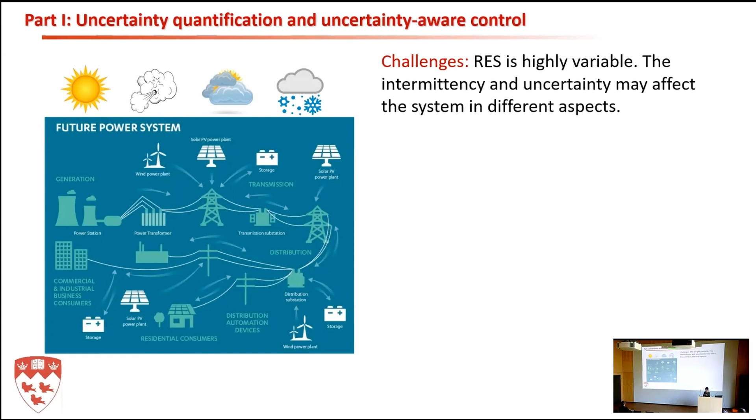Okay, so the first one, uncertainty quantification and uncertainty-aware control. The motivation of the work is the continuous integration of renewable energy sources. We all know that this trend is going to continue in the near future because we want to develop net zero power grids to mitigate climate change, to develop sustainable communities and so forth. The challenges of integrating renewables are obvious, right? They're subject to the weather conditions. The sun doesn't always shine and the wind doesn't always blow when we need the power. So they are highly variable, and the intermittency and uncertainty may affect the system in different aspects.

So here is just a figure to show the uncertainty we experience in the system. We not only have uncertainty on the load side, which is what we have originally, but we also have uncertainty on the generation side.

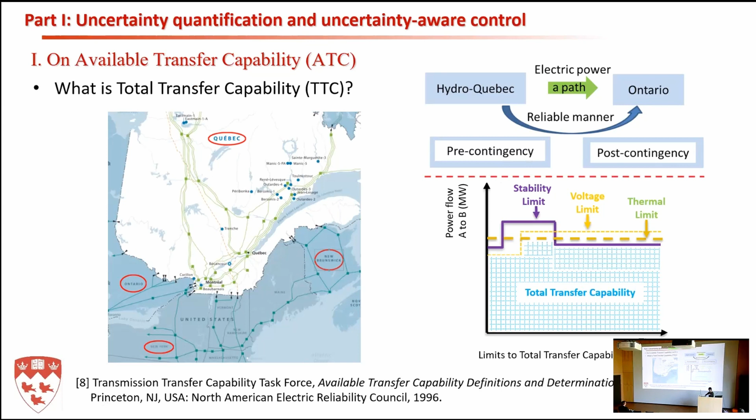So for example, if we want to transfer power from Quebec to Ontario, we want to make sure that the power transfer is carried out without violating the stability limit, the voltage limit, and the thermal limit. And as the power system is evolving and changing all the time, you can imagine that the total transfer capability needs to be assessed from time to time.

Okay, and then what is available transfer capability? Usually when we calculate it from the total transfer capability, we deduct three margins. One is the existing transmission commitments, which is the ETC, and the other one is the capacity benefit margin, CBM. These are determined by, for example, the utility market model or base power flow, which we just regard as deterministic values in this work.

But there's another margin which is very interesting. It's called TRM, the transmission reliability margin. It is reserved to account for the uncertainty of the system from different aspects like load or system topology change. All this uncertainty needs to be considered, so we typically reserve a margin just for that reason. Yeah, so this is how we calculate ATC conventionally. But in our opinion, when the renewables are coming to the system, it becomes highly volatile.

And rather than assess everything in a deterministic framework, we believe that we need to use a probabilistic framework to assess the TTC and ATC. So how does it work? So when we have the renewables and everything coming in, the TTC is no longer a deterministic value, and rather it's a random variable that may exhibit certain distributions.

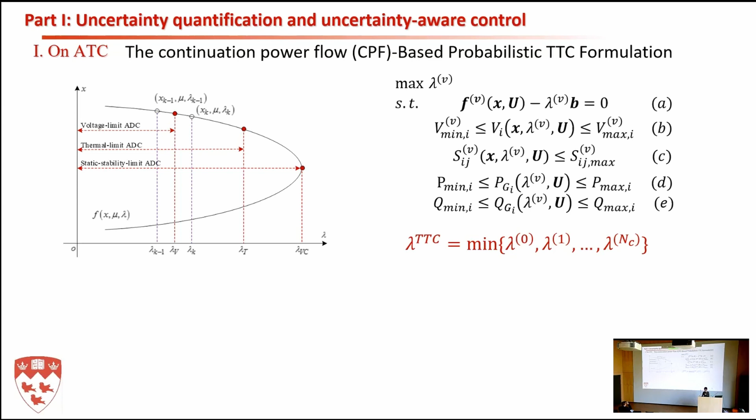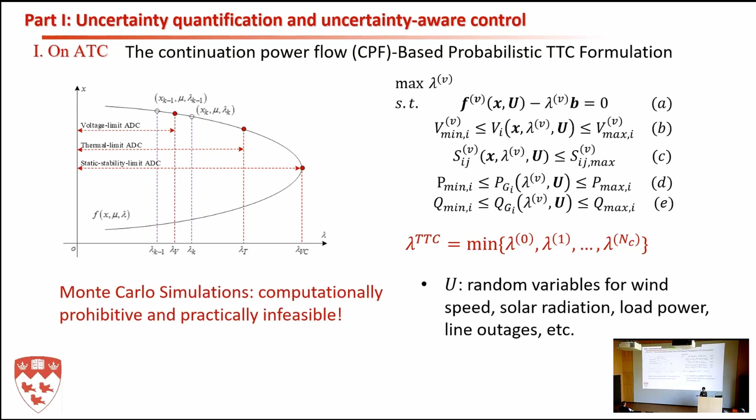And then when the renewables come in, it becomes more complicated because we are going to have random variables coming from wind speed, solar radiation, load power, line outages. So you can imagine if I want to get an estimate of the probability distribution of lambda, which is the TTC, the most straightforward way is to do Monte Carlo simulation, but it's going to take a long time, prohibitive computational effort, which is not practical in the real world. So what we propose in our work is to use the polynomial chaos expansion.

I know some of you may be familiar with this method because you're also working in this area. So we use the polynomial chaos expansion to effectively and accurately estimate the PTTC. Originally with Monte Carlo simulation, we generate a large number of random inputs, scenarios, and we feed them into the physical continuation power flow model, like what I showed here, and it gives you the response. You can do a lot of simulations and plot the histogram.

Well, the PCE does it in a different way. It first generates a small sample and feeds it into the physical model to get the response. And from the small number of evaluations, we try to build a surrogate model, which can describe the relation between the random inputs and the output by expansion of the polynomial series. So this is how it works.

And once we get this model, assessing the model response takes negligible time. We just generate the samples and substitute them into this model to get the model response Y. So this is why it saves time, because this model is just an algebraic model. Once you get this model, evaluating it takes no time. We only need a very small number of sample evaluations at the initial stage. So this is how it works.

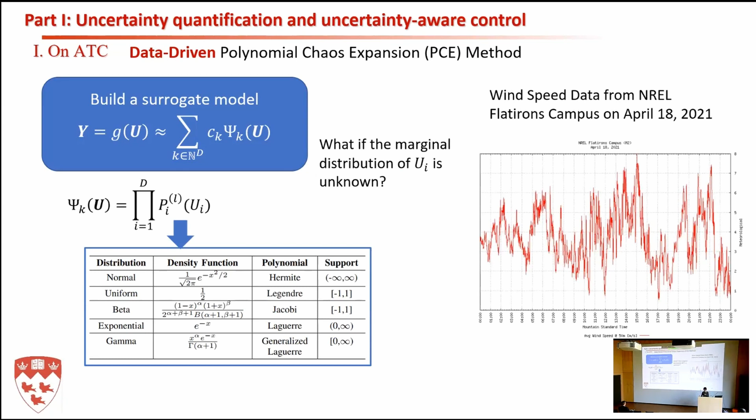And indeed, this is what I got from the website, that accessing raw data nowadays is not hard. Thanks to many initiatives, we have open data. All right, so in this work too, we use what is called the moment-based polynomials to build up the polynomial basis. So it turned out that we can simply use the raw data, and by using the condition that the polynomial bases are orthogonal to each other, we have shown that the coefficients for the polynomials and the raw moments of the data satisfy this condition.

Okay, and then it means that we can only calculate the raw moment of the data, and then we can calculate the coefficients. And with the coefficients, we can build up the univariate polynomial basis. And then using the tensor product, we can calculate the multivariate polynomial basis. And this is what we propose in our work too. This is a data-driven PCE method. And once we build up the polynomial basis, the remaining task is just to calculate the coefficients for the model, and there are different ways to do that. We adopt an advanced regression method called least angle regression to calculate the coefficients.

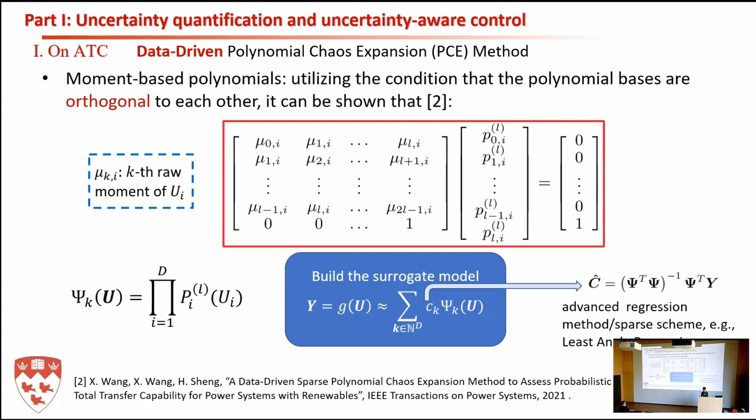All right, so this is how it works. Just to recap, we generate a small number of scenarios, we feed them into the model, get the response, and based on this, we try to build up the surrogate model. And then once we have the model, we can just generate a large number of random inputs to get the model response and plot the histogram.

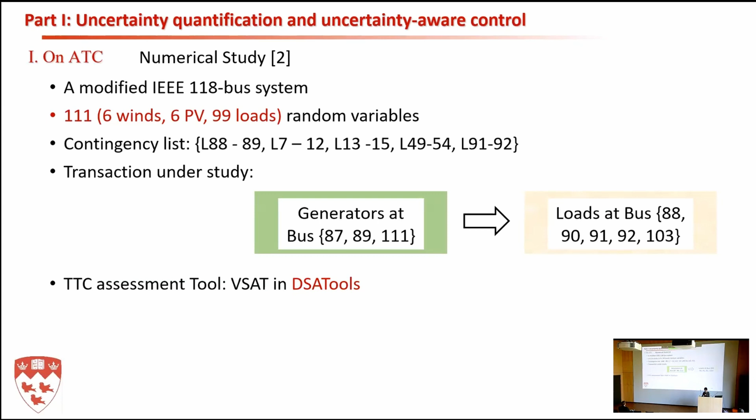Just to show some simulation results, this is what we do in a 118 bus system where we consider 111 random variables. 6 come from wind, 6 come from PV, and 99 loads. And for the transaction under study, we consider the power transfer from the generator at these buses to load at these buses. And the TTC assessment tool is VSAT in DSATools. DSATools is the commercial power system analysis software. I think it's what they use in both industry and academia.

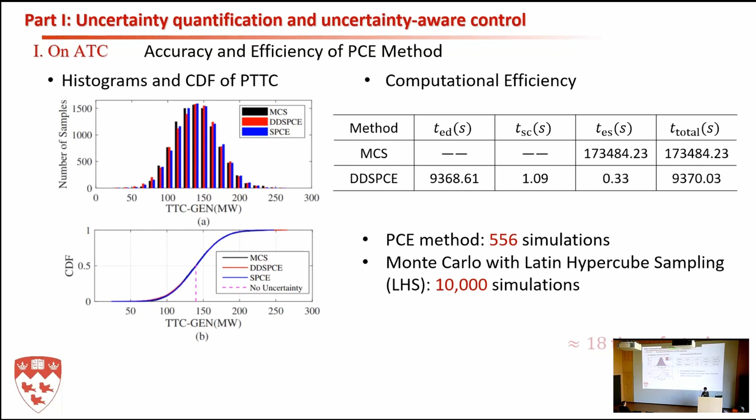And then we compare the computational efficiency. For the Monte Carlo simulations using the Latin hypercube sampling method, if we have to run 10,000 simulations, it's gonna take you 173,000 seconds, okay? But if we use the data-driven sparse PCE, most of the time is consumed by generating the small number of sample simulations and model responses. And once we generate that, building up the model and the sample evaluation takes very little time. So in total, it takes around 9,370 seconds. So it's around 18 times faster than the Monte Carlo simulations.

And another interesting thing we observe is that, for example, if we just adopt the deterministic framework to estimate ATC, we reserve 5% of the TTC to be the TRM, right? And then it will be around 6 megawatts, and the resulting ATC is 132 megawatts. However, if we use a probabilistic framework, if you still remember, we use the difference between the mean value and the 5th percentile of the TTC as the TRM, okay? And it's gonna be 49 megawatts, and the ATC will be 90 megawatts.

So it means that when we consider the uncertainty of the renewables and all the loads in the system, the ATC needs to be reduced by more than 30%, which is a very significant amount, okay? But what I'm saying is that it's not always a reduction, right? Sometimes it might even increase, but we just want to get a more accurate estimate of the ATC so that you can ensure the system security and in the meantime fully utilize your transmission assets, right? Because power transfer actually means money, okay?

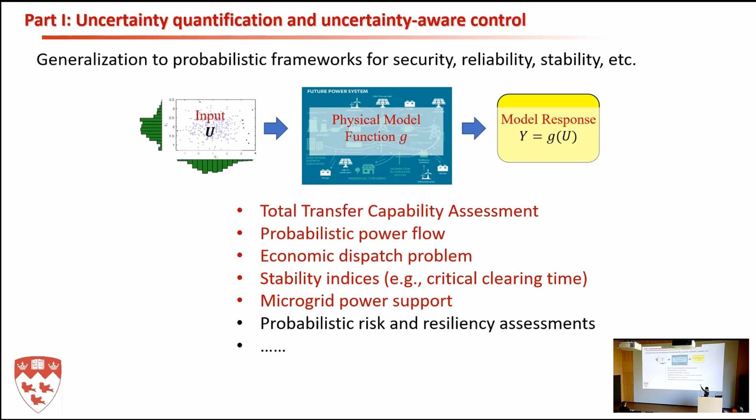applications. So here are just some examples of the applications we can consider. Those marked in red are something we have already studied in our group, and there are also some other things we're going to investigate. Like probabilistic power flow, for sure, economic dispatch problem, the stability index, the microgrid power support, okay? And for different applications, the only different thing is the physical model, right? And the methodology can be universal.

So, for example, we consider how the uncertainty is going to affect the economic dispatch cost. And in this problem, the model response will be the cost, the minimum cost of the economic dispatch. So we're trying to dispatch the power output of the conventional generation while considering the uncertainty from the renewables. So this is basically the model formulation.

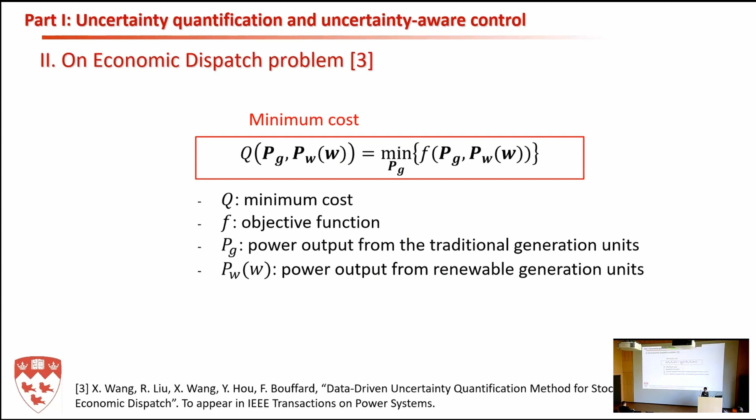And in this case, as I said, the model response rather than TTC will be the cost, minimum cost of the dispatch. And we consider an integrated energy system. We have a 118 bus system integrated with a 20 node gas system. And in this study, we consider 120 random variables, 5 coming from wind farms, over 24 hours. And total installed capacity is about 12.3% of the total capacity.

All right, so again, we first compare the estimation results for the CDF and PDF. Both data-driven sparse PCE and sparse PCE can give pretty accurate estimation. In this case, you might observe that the distribution of the cost is kind of irregular compared to the TTC. It's kind of multimodal, not clearly a Gaussian distribution. So at the beginning, we were concerned that the PCE may have some challenges, but it turned out that it can still give relatively good estimation results.

And also here, just to note that we use the real data from the website for the wind. In the last study, we used emulated data, but in this study, we try using the real wind data and see how it works.

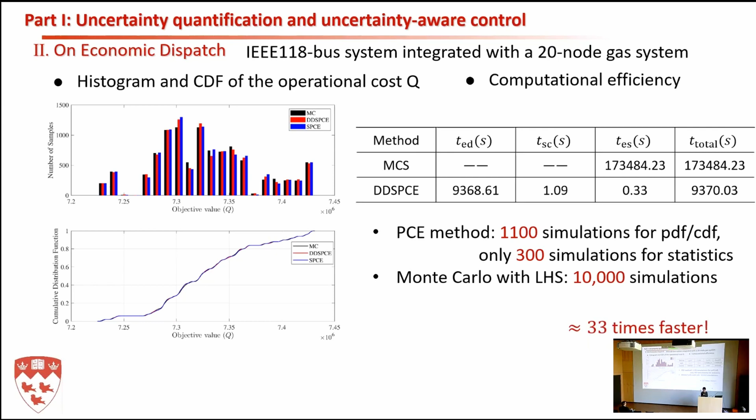And also we compare the computational efficiency. Again, if we only want good statistics like the mean or the variance, the PCE just requires 300 simulations to provide accurate results. However, if we want very accurate PDF and CDF, we need a few more simulations, like more than 1,000. But no matter what, that is a lot faster than the Monte Carlo simulations.

Okay. We also investigate another surrogate modeling method, which is called low rank approximation, and we apply that method to the probabilistic power flow problem. Low rank approximation methods may have better scalability, but generally speaking it is pretty similar to the PCE. And we try to estimate the power flow solution, the PDF and CDF.

Okay, so these are the insights and conclusions. We have seen the detrimental impacts from the randomness of the renewables, loads, and line outages. They may affect the transfer capability, and we may have a high probability of violating the operation limits because of that. On the other hand, the utilization of uncertainty quantification methods may be very helpful to advance the development of a probabilistic framework for secure operation and stability assessment of power systems. So this is what we want to promote.

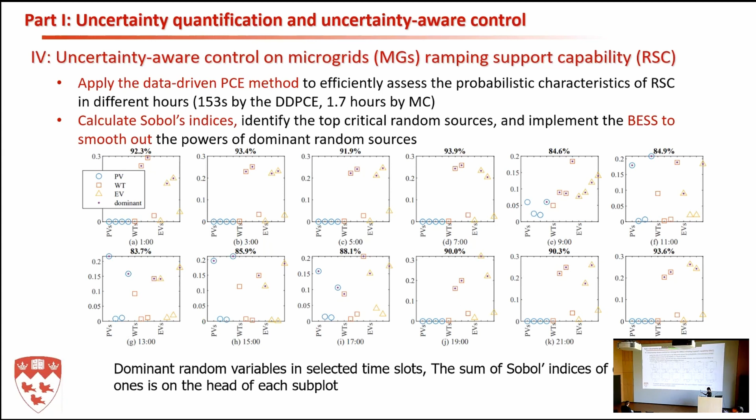For example, the EV. The EVs here at 9 o'clock are pretty high, but at some other hours, at midnight, the middle two are important, and at 11 o'clock the first and the last one are important. So without doing this analysis, you can hardly measure the importance of the random inputs. But by doing this analysis, we can actually pinpoint the critical random inputs from time to time.

Then by smoothing out their randomness, which means reducing their variance to 0 while keeping the mean values, using the energy storage system, we can narrow the probability distribution of the ramping support capability a lot. In the probability sense, it means we can increase the ramping support capability, the amount of power the microgrid can support the main grid with, without adding an additional energy storage system. We just add a control to control the variability; we don't add additional energy storage.

We don't increase the capability of the BESS. Okay, but just by controlling the variability, we can do that. So this is the ramping support in the base case, and the second row represents the ramping support capability after implementing the energy storage system, and this is the improvement.

Okay. All right, so this is what we have done so far, and this is something we are currently working on. It's about power system resilience, right? How the power system is going to respond under extreme weather, which is a great deal in North America. We have experienced more frequent and severe extreme weather, like freezing rain or snowstorms, and people are very concerned about how resilient our critical infrastructure is when subject to these extreme weather events.

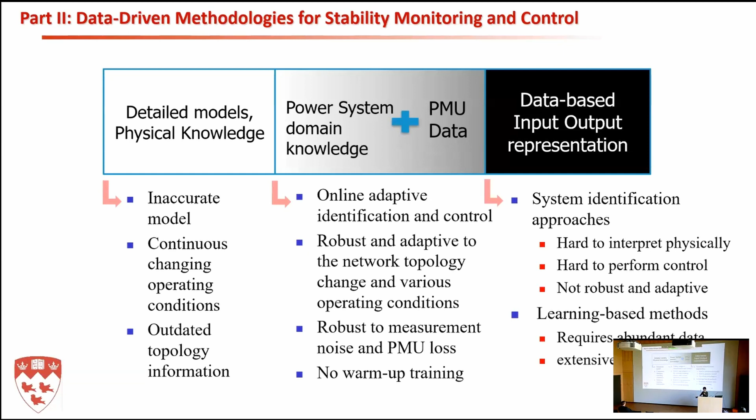So we try to utilize the data available in the system, but in the meantime integrate power system domain knowledge. As a result, we can develop online adaptive identification and control methods that are robust and adaptive to system topology, and, more importantly, require no warm-up or offline training. So they can just be implemented online adaptively. So this is the goal of my group.

So in this area, we have considered many different applications. We have developed online data-driven methods for wide area damping control, secondary voltage control, inertia estimation, dynamic load model identification, and locating forced oscillations, right? Especially when the oscillation frequencies are at a resonant frequency, you can see a lot of oscillations, but you can hardly pinpoint the source. And we have also worked on voltage and frequency control for microgrids. So I'm going to just talk about a few applications, given the time.

First is wide area damping control. We have inter-area oscillations, I'm not sure if you're familiar with that subject, right? It's a long-lasting research topic in academia and also in industry. Two areas are oscillating against each other, and local damping is not going to work. We really have to consider the whole system and carry out the control systematically.

Okay, so the theoretical basis of the methodology we developed is as follows. We assume that in ambient conditions, the power system dynamics can be described by stochastic differential equations. So particularly, we have the state variable and the system state matrix, and Xi is a Gaussian random variable describing the stochastic variation in the system coming from loads. Okay.

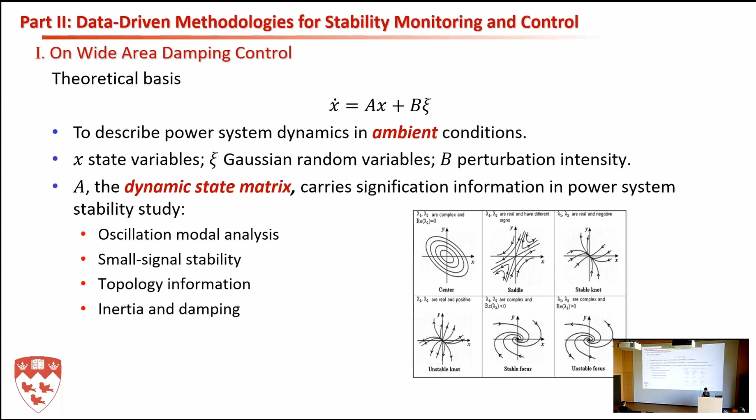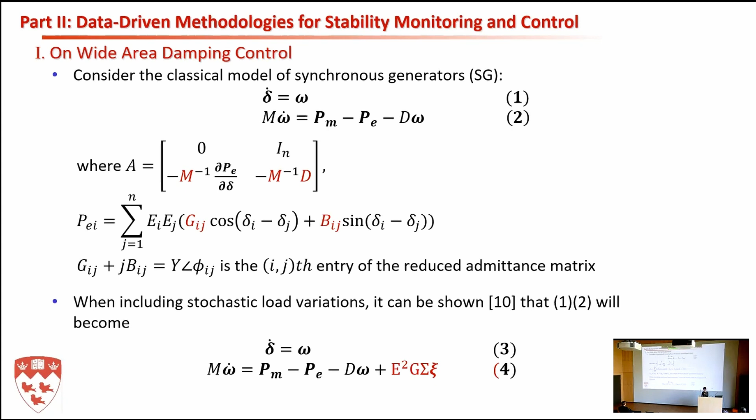And then in our work, we have shown that when we consider the load variations in the system, the swing equations can be approximately represented in this way. So compared to the conventional classical model, we have a stochastic perturbation term here to describe the load variation. And then if we linearize that equation, we obtain a stochastic differential equation, which is actually a multivariate Ornstein-Uhlenbeck process, OU process.

And then we utilize an important property of the OU process. It says that if A is stable, then the regression theorem of the multivariate OU process says that the correlation matrix is governed by this differential equation. And particularly here, G is the tau-lag time correlation matrix, calculated in this way. So it's a statistical matrix, and it can be estimated from PMU measurements, okay?

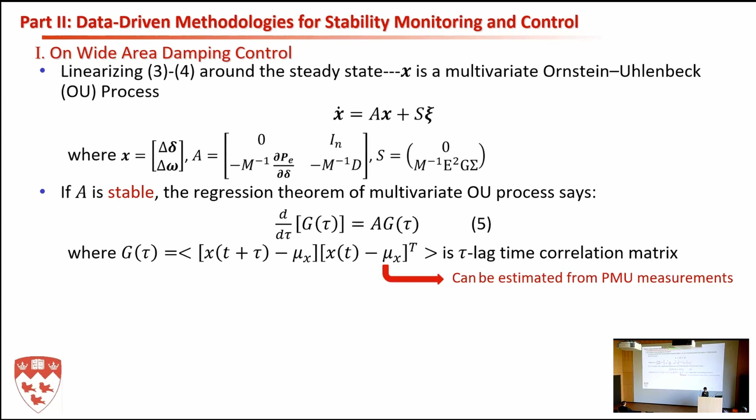So if you have PMU measurements, you can get delta and omega, and based on that, you can calculate this matrix. And then by solving equation 5, we can get the A matrix from the tau-lag correlation matrix. So the important message here is that this important dynamic system state matrix A can be estimated purely from PMU measurements without any knowledge of the dynamic model parameters and without the network parameters. So that's the important insight here.

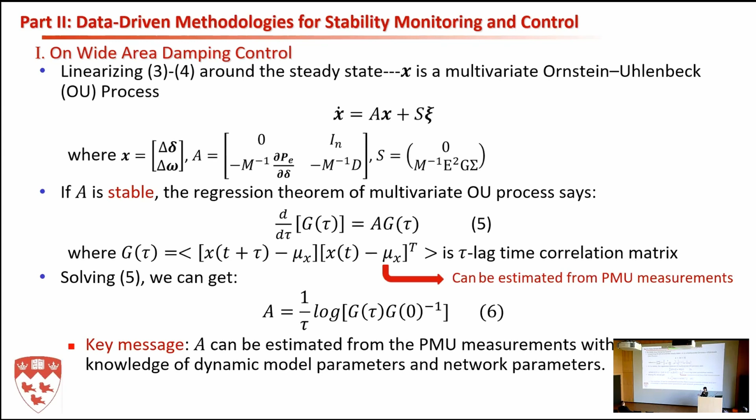So by solving this, utilizing equation 6, we can obtain this matrix from PMU, and then we can get the system state matrix, which is the true system state matrix. All right, so this is the theoretical basis for the very simple swing equations.

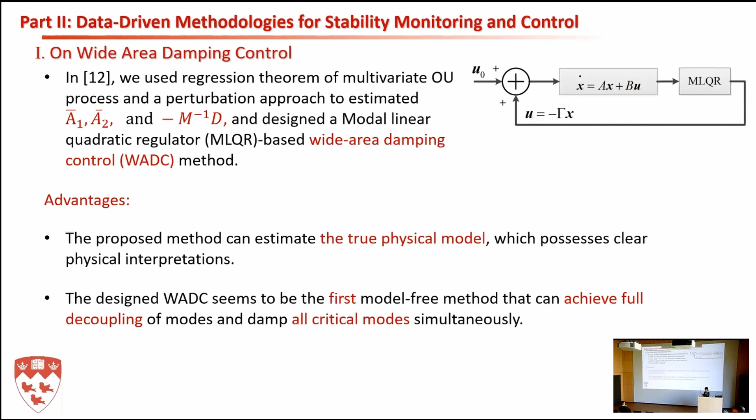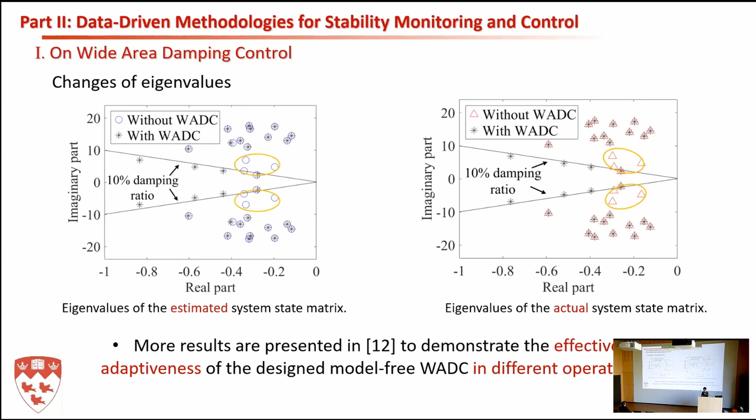So here's a study. I won't go into the details, but we estimate each of the submatrices, and we can see it's very accurate. And we can carry out the control. We want to bring all the critical inter-area oscillation modes to the well-damped region, and we can do that. So I give the reference. If you're interested, you can go into the paper.

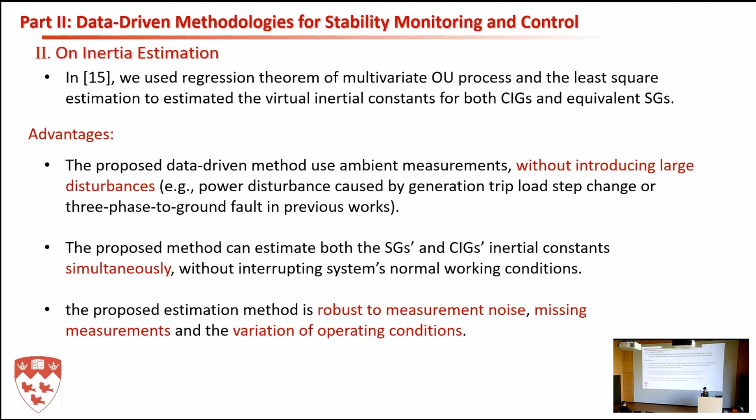So this is actually compared to the state of the art, right? We are not the first ones considering this problem, but the advantage of our method is that we can do it in ambient conditions, and we can simultaneously estimate their inertias. And also we have demonstrated they are robust to measurement noise, missing measurements, and different operating conditions. All right, so this is the simulation we consider: a 68 bus system with 3 CIGs.

And this is the inertia estimation without considering measurement noise, and this is considering the measurement noise. We also consider there are some missing measurements from some generators, but we can still estimate the inertia of the rest of the generators. And then we also test the adaptiveness of the methods when the topology changes or when the inertia constant changes from one value to another. It may happen for CIG, especially when you change your control modes or your power capacity changes, and the inertia constant will change, right?

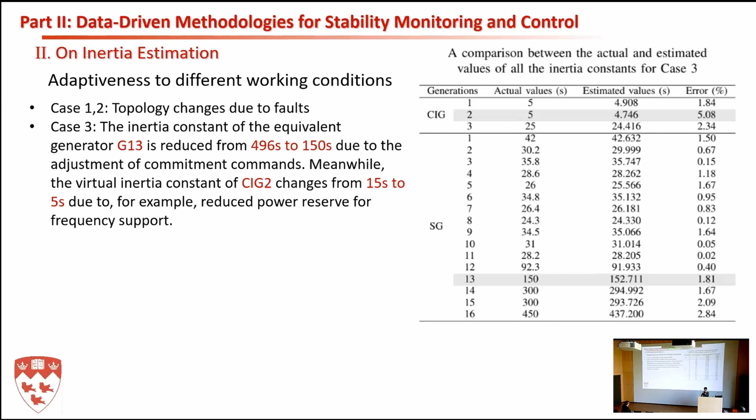But it's very important to get an accurate estimation of the inertia because otherwise you will have a problem predicting the frequency response of the system. For example, here we show that when the inertia constant of a CIG changes from 5 to 50, the frequency response of the conventional generation will also be affected by the inertia of a CIG somewhere else. So if you really want to ensure the frequency stability of the system, you have to get very accurate inertia information for all the generators and CIGs. And also, when the CIG virtual inertia is 50, we can see significant improvement in the frequency response.

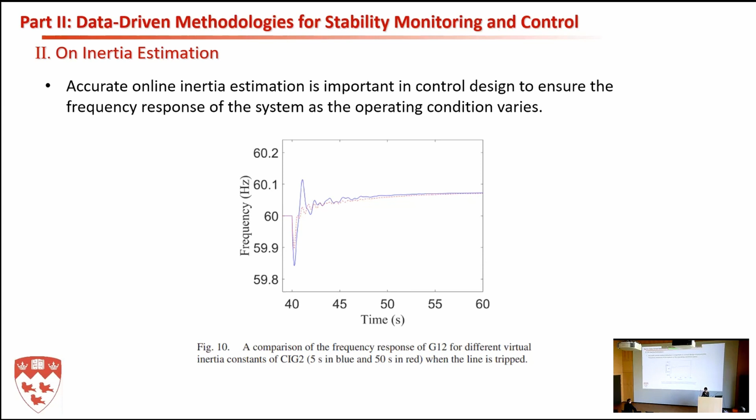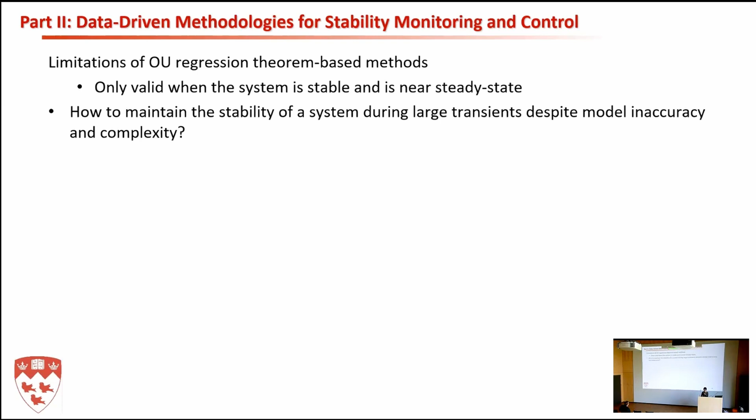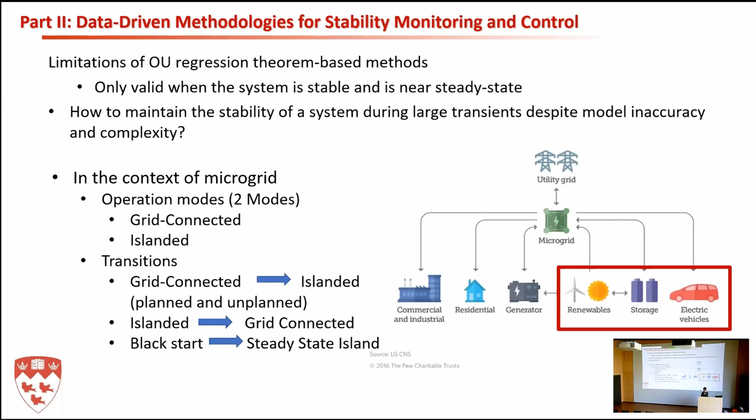All right, so this is all the methodologies and applications we developed based on the OU regression theorem method. And there are some limitations you may realize. Firstly, they only work in ambient conditions, when the A matrix is stable, right? That's the assumption of the regression theorem. So the question in my mind is, what if we have a large disturbance? How do we ensure the stability of the system under large transients despite modeling inaccuracy and complexity? Especially in microgrids, we have different operation modes and their control modes may be very complicated. How can we handle the complexity? And also there is low inertia and nonlinearity, and all these are the challenges of microgrids.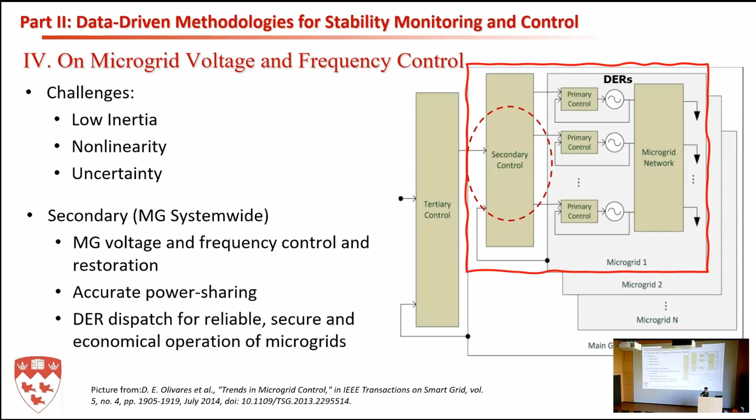So this is the control structure of the microgrids, right? Oh, wait, yeah, okay. So we have primary control, which describes the fastest response of the DERs under large disturbance. We have the secondary control, which takes care of voltage restoration, frequency restoration, and power sharing. And we also have tertiary control, like coordinating different microgrids, for example. Our work focused on the secondary control. We consider the voltage and frequency control and restoration under large disturbance.

Okay, so the problem formulation is that we consider the secondary control of the microgrids can be described by the conventional droop functions. The droop function describes how the power and reactive power variation affects the angle and voltage at the terminal buses. And the secondary control is trying to adjust the reference power P and Q so that it can quickly restore the voltage and frequency to their nominal values after a disturbance. Again, P and Q are the real power and reactive power injections, which depend on the system topology, the network information. We have the conductance and susceptance here.

Of course, there are existing methods, and PI control would be the most commonly applied. But our argument is that it may not be effective when the operating condition and the system topology change, because they're only tuned for a specific base case, right? And when your system operating condition changes, that may change.

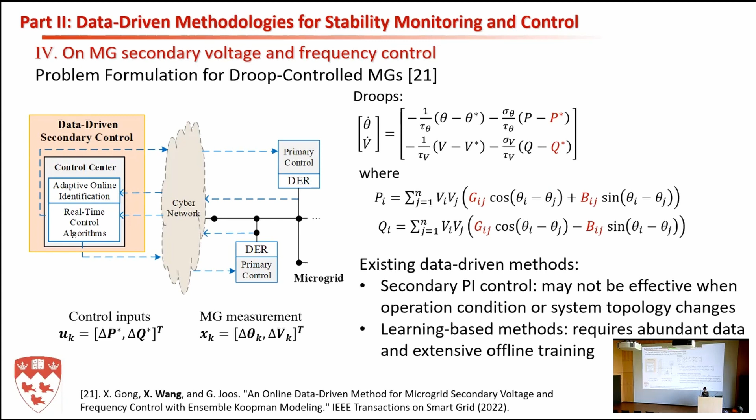And also there are learning-based methods; as I said, they may require a lot of data and offline training. So what we did is to develop methods based on Koopman operator theory. The key idea of Koopman operator theory is that it can transform a nonlinear dynamical system into an infinite-dimensional linear system under a Koopman embedding mapping.

After you transform a nonlinear system to a linear system, the advantage is that all the well-developed control methods for linear systems can be applied, with guaranteed stability properties. So that's the advantage. Koopman operator theory says that under an embedding, a mapping G, the Koopman operator K will advance the embedding G linearly in the Hilbert space H. So we have to find the mapping G, and under this mapping the system is going to advance linearly.

In microgrid secondary control, we consider an approximation of Koopman in the form of extended dynamic mode decomposition with control. We assume there's a nonlinear mapping G, and under this mapping the system can advance linearly. So it's a linear state space model, and it can describe both small signal linear dynamics and large signal driven nonlinear dynamics globally.

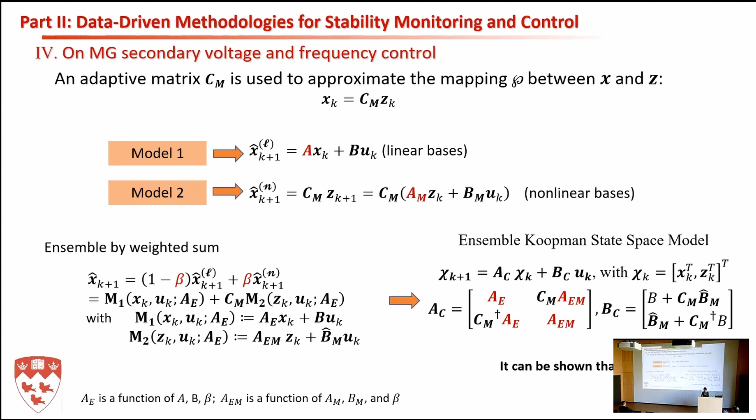So we assume AEM is fixed and try to use regression to get AE. And then we assume AE is fixed and try to get AEM. So we do it iteratively until the regression error is small enough. Okay, this is just the key idea of the method. I know for the details we have to look into the paper, but this is the idea of how we do system identification.

All right, and then once the regression error is really small, we can get our Koopman ensemble model, right? And then we can carry out control. So that's the key idea.

All right, so the advantage of this method is that we have shown mathematically that this adaptive Koopman operator optimal control method is BIBO stable, bounded input, bounded output. And we also provided sufficient conditions for the asymptotic stability of this control method when subject to large disturbance, okay? And this method has well-characterized stability properties due to the linearity of the Koopman operator.

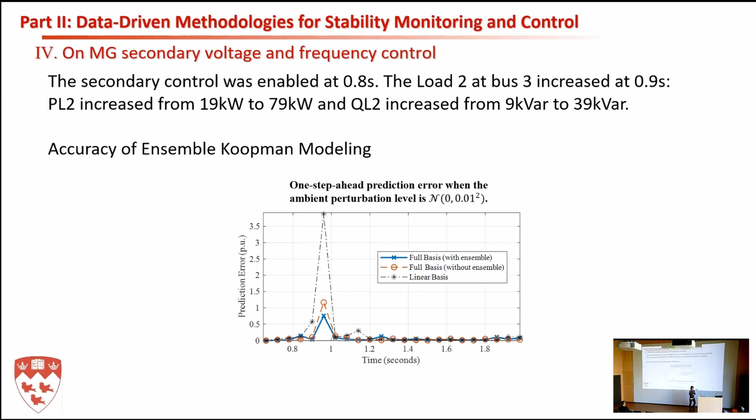So we first try to see how the ensemble Koopman modeling helps in predicting the trajectories. So this is the prediction error, okay? When we have a large disturbance, we compare the full basis with ensemble, the full basis, meaning linear basis and nonlinear basis but without ensemble, where we just assume the weights are 50-50, and then just linear basis. So you can see that with the full basis ensemble, we have the lowest prediction error under large disturbance.

All right, so some current work we are doing is that we're trying to develop Koopman-based methods that can extract the true model. Again, the method we just developed is a system identification approach, right? We integrate domain knowledge, but still we cannot guarantee the model we identify is the true model, and we are working on extracting the true model so that the methods can still work well in unforeseen, untrained, very weird contingencies.